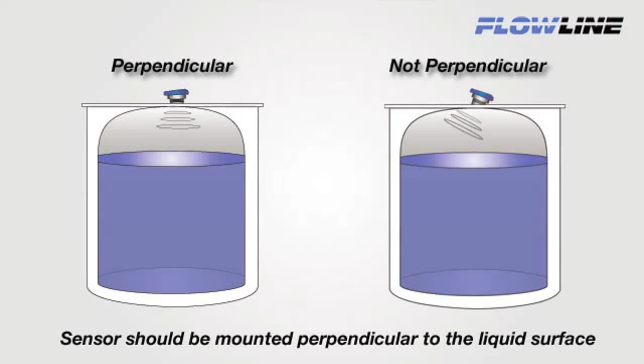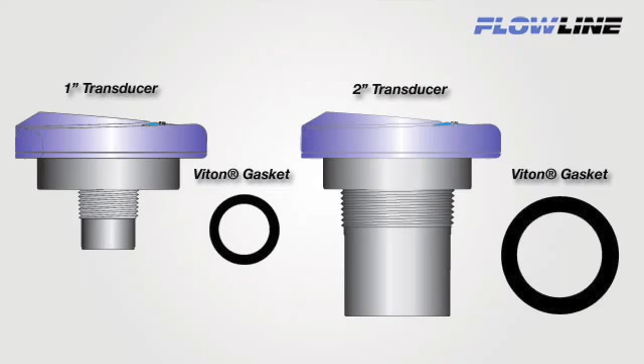Flowline ultrasonic level sensors are available in 1-inch and 2-inch transducer sizes. A Viton mounting gasket is included with each sensor and should always be used when installing it. Avoid fitting types or shapes with thick mounting structures located around the transducer threads greater than 3/8 of an inch.

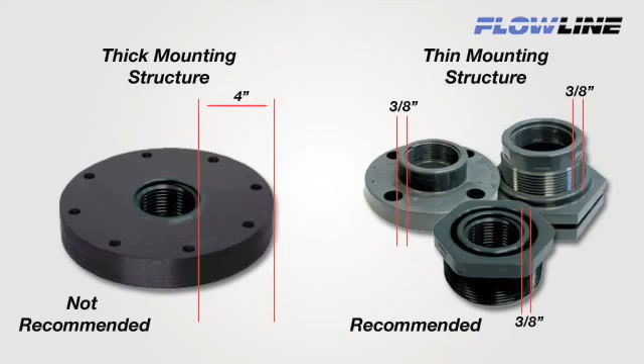Thick walls tend to store and reflect acoustic energy, which may interfere with the sensor's operation. For best performance, we recommend the use of Flowline plastic fittings or equivalents with thin wall mounting structures that isolate the transducer.

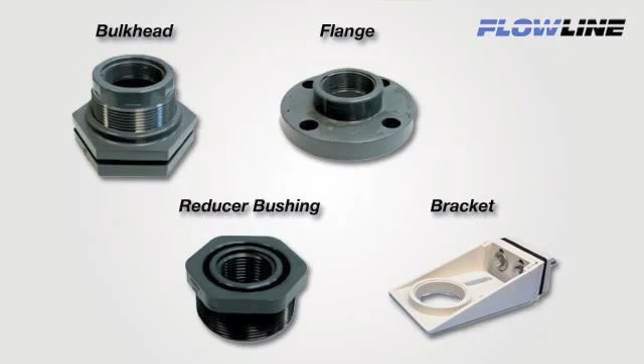There are 4 standard fitting types: bulkhead, flanges, reducer bushing, and brackets. They are available in a variety of sizes, styles, and materials of construction. Flowline has all the standard fitting types necessary for installation of our sensors, available to view on our website, flowline.com.

Plastic bulkhead fittings are typically used on enclosed polyethylene tanks. They're easy to install. Just cut a hole through the flat tank top, insert the adapter, and thread down the nut. 2-inch is the standard bulkhead fitting size.

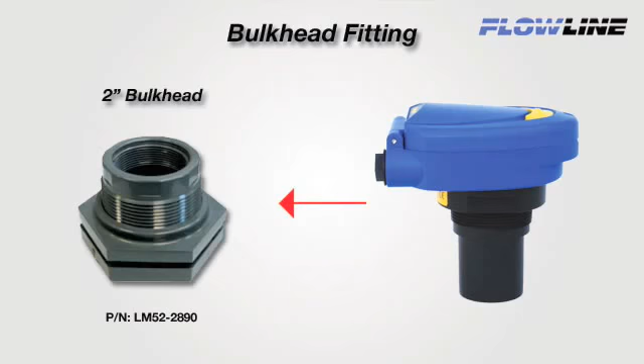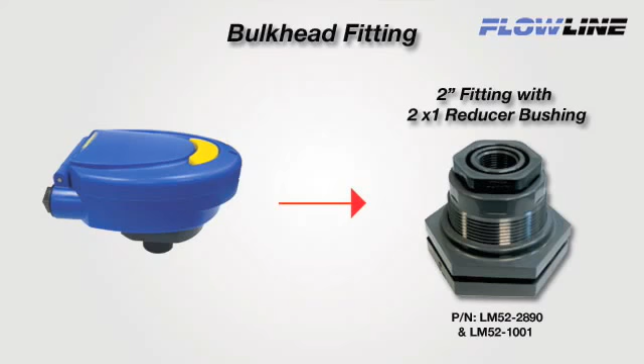Use Flowline's 2-inch LM52-2890 low-profile adapter. Our 2-inch transducer sensors thread right into the fitting. For 1-inch sensors, add a 2-inch by 1-inch reducer bushing, like Flowline's 2-inch by 1-inch thread by thread reducer bushing LM52-1001. Avoid adapters with internal threads or pipe stops forward of the installed transducer.

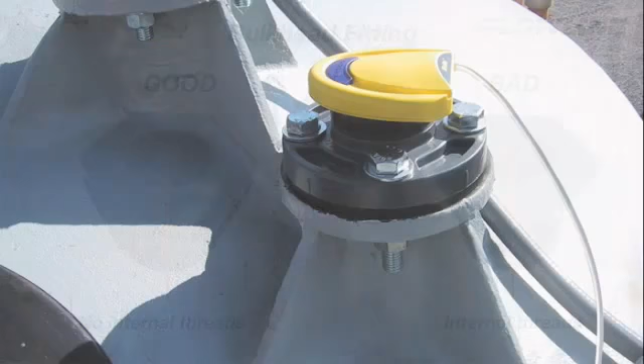Flange fittings are standard on fiberglass tanks and some metal bulk storage tanks. Select a flange with mounting threads that are above the plane of the flange, such as Flowline's 1-piece 2-inch LM52-2850. With 1-inch transducers, use the 2-inch flange and then use a Flowline 2-inch by 1-inch reducer bushing.

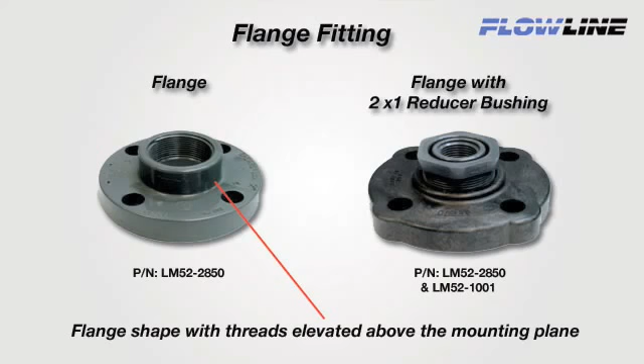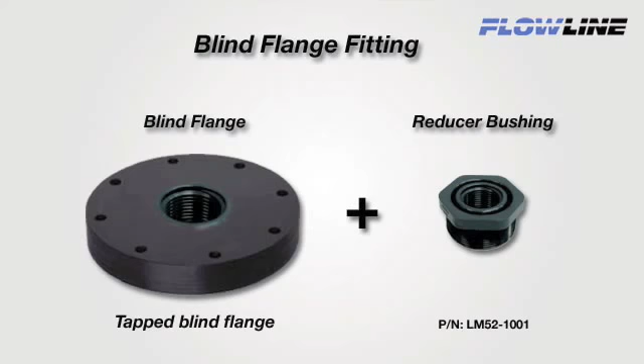If you wish to use a blind flange, then tap a female thread that is 1 inch larger than the sensor's transducer and add a reducer bushing, such as Flowline's thread by thread 2-inch by 1-inch LM52-1001.

A reducer bushing will provide good isolation of the ultrasonic signal when mounted. You must use a reducer bushing that isolates the sensor with a gap between the inner and outer threads. Flowline's 2-inch by 1-inch thread by thread LM52-1001 reducer bushing is ideal for all 1-inch sensors.

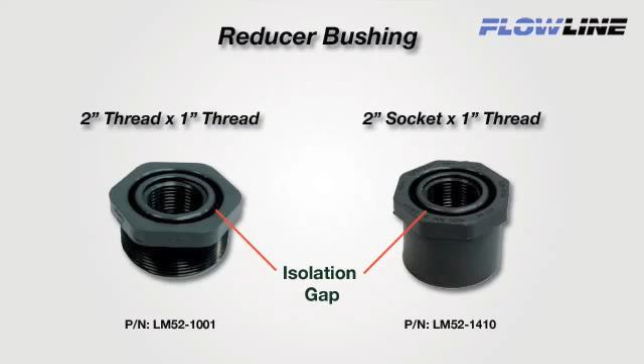To avoid acoustic interference, you must stay within our maximum riser height versus inner diameter guidelines. Riser height is defined as the distance from the installed face of the transducer to the opening in the tank. The riser ID dictates the maximum riser height that the sensor can be installed on.

For example, if the riser ID is 2 inches, then the maximum riser height is 3 inches. If the ID is 4 inches, the maximum riser height is 8 inches. The wider the riser ID, the taller the maximum riser height of the sensor can be.

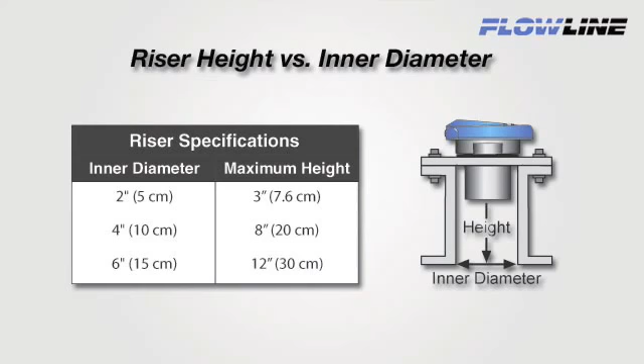For installation on open tanks, select the Flowline LM50 side mount bracket. The adjustable polypro bracket is easily bolted to the tank sidewall or associated mounting apparatus. The LM50-1001 has a 2-inch female thread.

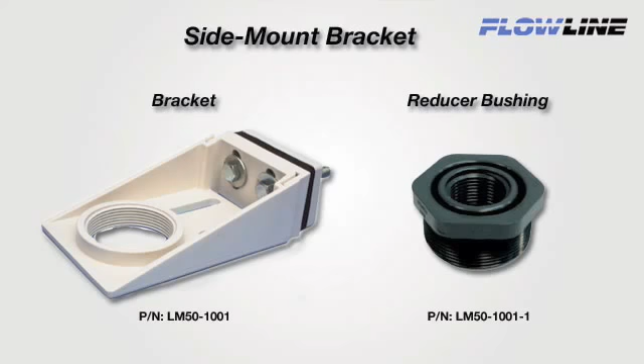The LM50-1001-1 includes a 2-inch by 1-inch reducer bushing. Custom fabricated brackets can also be used following the previous guidelines.